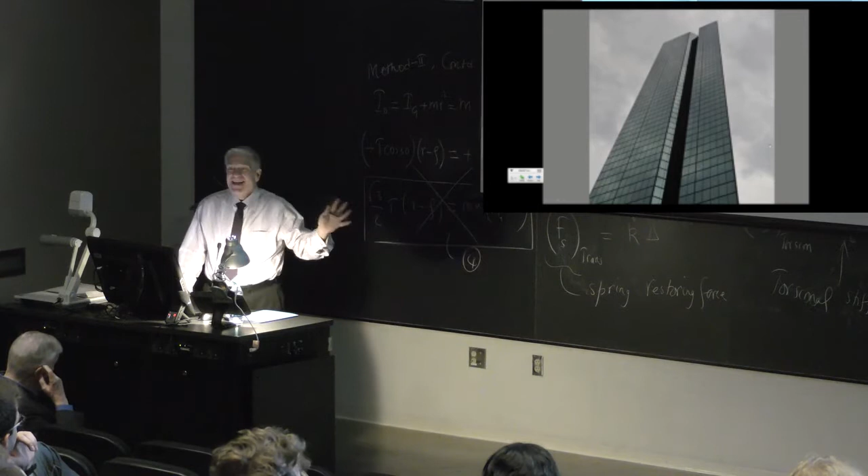Now, there are dozens and dozens of cases like this, and I'm not going to show them all to you, but my favorite one of all, this is the effect of dynamic symmetry that I think you'll see. And so it's these two together. This is the most spectacular case of all of that double symmetry.

These are the Center for Government and International Studies at Harvard, and you'll notice that it's the twins rotated opposite from each other, and Cambridge Street goes right down the middle of it. Now, it's pretty weird from here, but when you're walking down that street, this is exactly what you see.

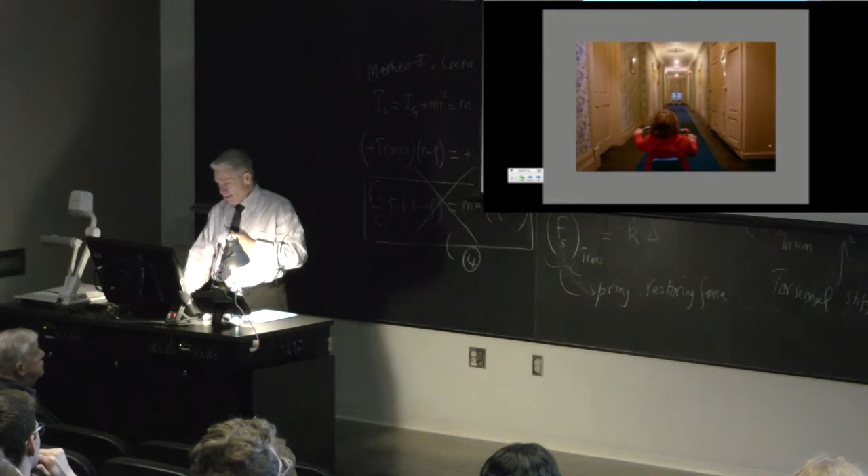As you look on the left and you think, wow, that's a nice kind of weird building, and I get the geometry, it's very simple. Then you look on the right and you go, whoa, wait a minute, what's that? Then I thought about this a lot.

In his lecture, he starts talking about the Carpenter Center. I thought, wait a minute, this is nothing but the Carpenter Center reinstalled back at Harvard, because as he discusses the Carpenter Center, he's lamenting for Corb, because Corb, instead of getting to be built on the quadrangle, he got ostracized to the outskirts of Harvard.

And so the entire analysis of the road through the two lobes was a lament by Corb and a kind of aggressive act of brilliance, what he calls a nuclear work of architecture. And I realized Harry has just been thrown off of the Harvard campus. He doesn't have another building on the Harvard campus, and so he's feeling a kind of sympathy with Corb, and maybe kind of a nightmarish sympathy with Corb, and coming from the world in which Drew Faust runs.

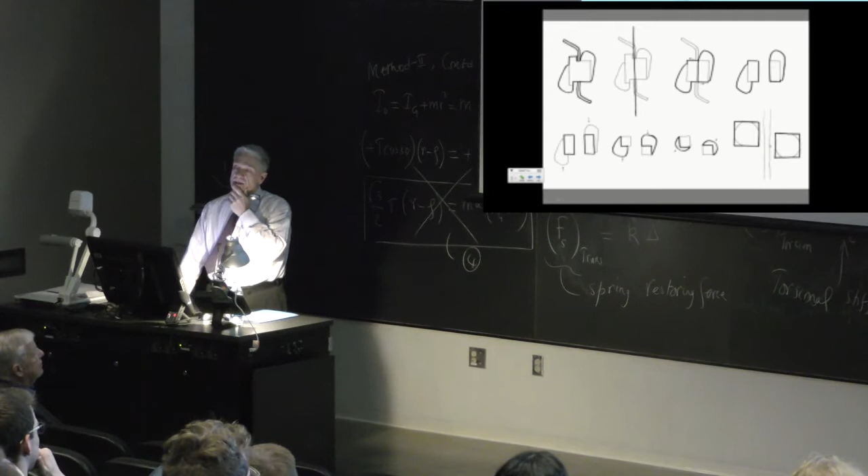Alex Mann and I tried to work out the transformational drawings. You can kind of see how it happens. And as I was doing this, I thought, there's something really weird about this, because if you do exactly the same geometrical transformation that changes the lobe into the teardrop, you can see it, if you did that to B, it would change it to R, and it would change Cobb to Corb. It's a very interesting thing we started to think about.

And so anyway, I don't want you to think this is the only horrific side of Harry, so I'm going to show you one little thing. He's also done recently an installation at SciArc. Okay, Dustin, there you go. And this is just a little film of the installation.

And where he decided to build a hypostyle hall, and the idea was he was going to take 3x8 doors that he bought at Lowe's or something like that. 3x8 because they're the most humane proportions of a door. And then he was going to build a hypostyle inside this gallery, and this is how you can see it working. These are people walking around through it. And those are the hypostyles, and then those are the doors, and it's quite a brilliant piece of architecture.

But as you look at it and as you study it, you realize there's something very weird about it. Like, this is it in perspective. What's weird about it is it's really a scary place. You can hide in it. In fact, it's so scary, it becomes the very apotheosis of what you don't do in a city.

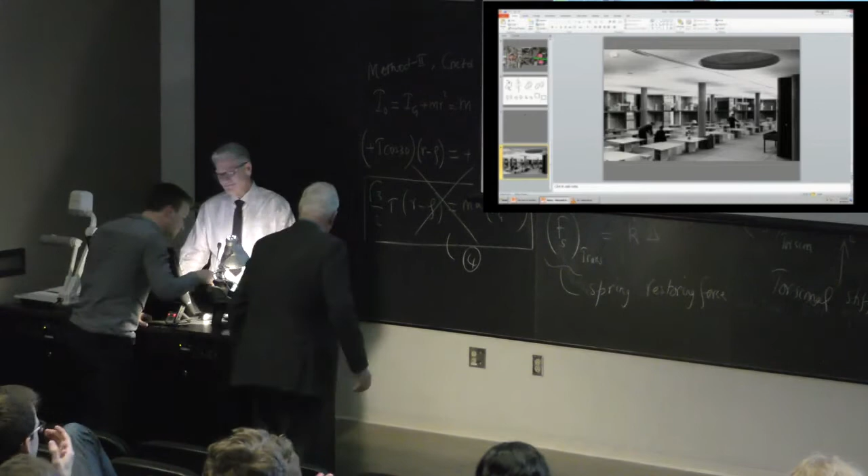Okay, let me get it for you. Let me start it, okay? That's it, perfect, thank you. I'm going to take this and put it up there.

Well, Jeff, that was wonderful, thank you. I certainly have no intention of making any claim on an analogy between COBB and CORB, but I really appreciate your analogies, and I'm delighted to be here with you and with Wes Jones for these seminars and for this lecture.

Now, as a prologue to my talk this evening... something's not working. Try now. Okay, thank you.

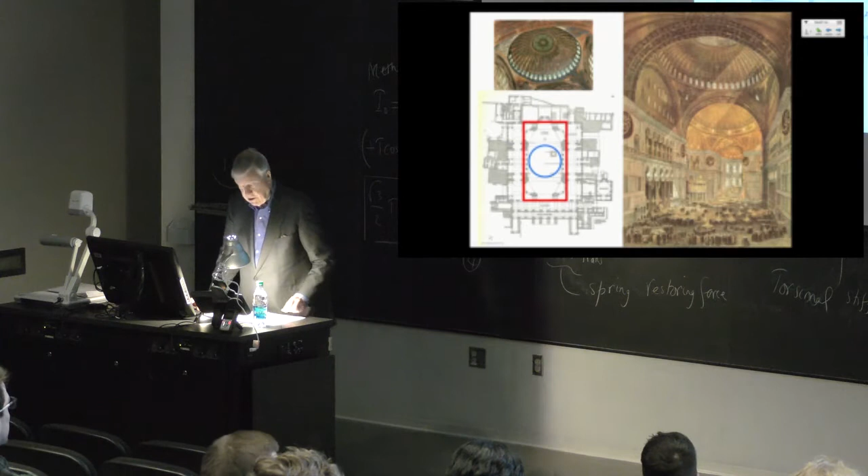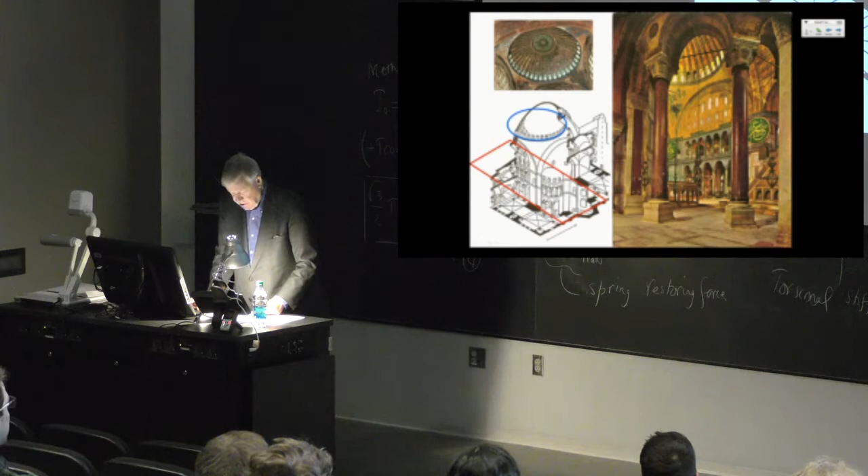Structurally, Hagia Sophia is a brilliant tour de force, but this accolade does not begin to explain the emotive intensity of its interior. What stirs us in this extraordinary polyphonic composition is the bringing together of two powerful but opposite intentions: stability, absolutism, wholeness, symmetry, juxtaposed with asymmetry, incompleteness, anxiety, and aspiration. Each of these two opposing value systems is rendered eloquent by the presence of the other, and they are synthesized in a way that greatly intensifies the dialogue between them.

Here, architecture has given voice to St. Augustine's conception of love as a dynamic, energizing force, a forward movement of the mind. And yet, here we also see this characteristic Christian impulse, this anxiety of spirit, brilliantly joined with its opposite, a reassertion of absolutism and immutability in the temporal affairs of mankind.

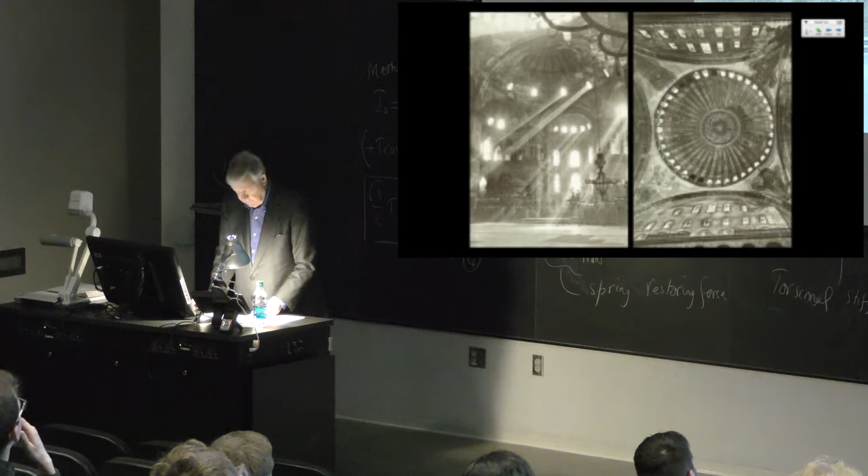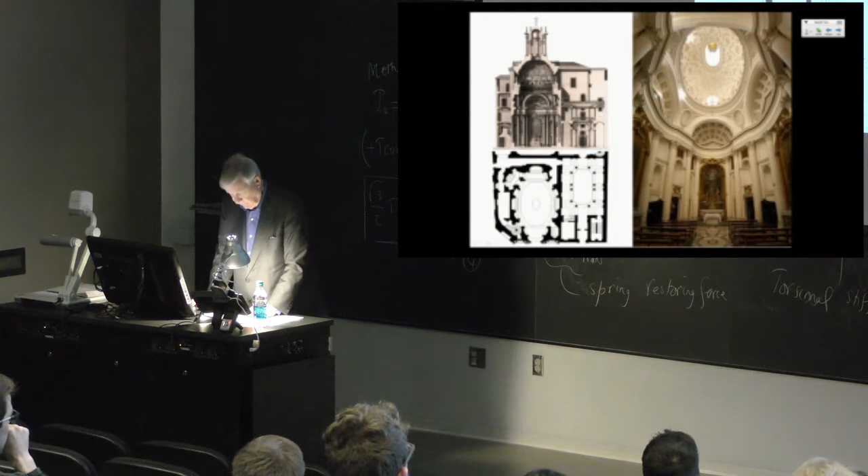In the 17th century church of San Carlo alle Quattro Fontane in Rome, Francesco Borromini gave entirely new meaning to the discourse between dome and basilica first evidenced in Hagia Sophia. Here we see both forms have been radically reshaped so as to produce a dynamic and highly integrated spatial construct wherein the aspirational and the immutable are joined to form a geometrically complex and infinitely suggestive whole.

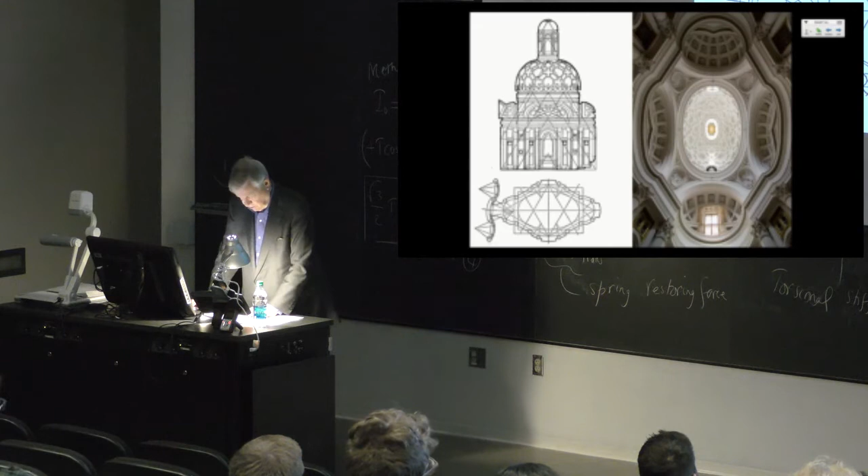The indispensable operative element in this great work is the undulating entablature that distorts the array of columns below while forming a base for pendentives that then make the transition to the oval dome above. The discourse thus engendered redefines the nature of the struggle between aspiration and absolutism. What in Hagia Sophia is presented as an unresolved conflict between church and state is here declared to be an unresolved conflict within the church itself, a conflict brought vividly to life by the genius of the architect.

The stated purpose to be served by the building was the integration of the visual arts, both their appreciation and their practice, into the everyday life of the college. But instead of being granted a suitably prominent place in the Harvard Yard with its spacious quadrangles crisscrossed by diagonal paths, the Carpenter Center was relegated to a cramped and altogether marginal site hemmed in by pre-existing buildings.

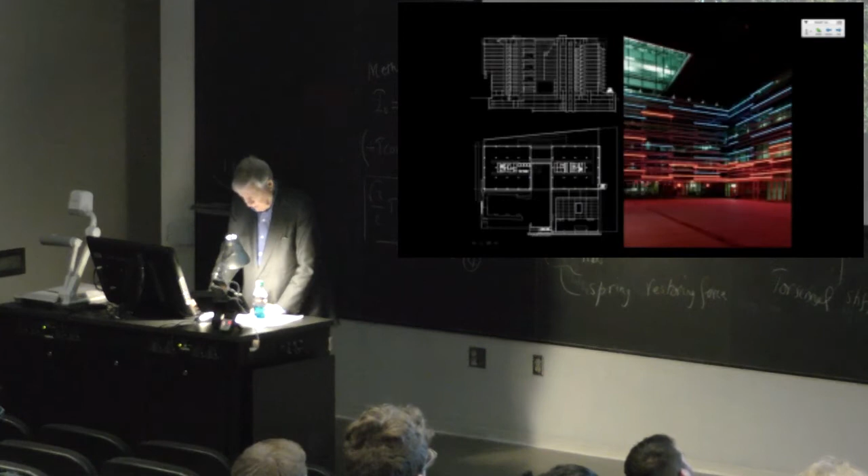The Caltrans District 7 headquarters in downtown Los Angeles, completed in 2004, is one of Thom Mayne's most provocative built works, inviting a question similar to that raised by Palazzo Chiericati. Is the enormous void in this building's otherwise impenetrable volume to be understood as a gathering place for its employee occupants, or as an extension of the city's public realm? And as with Palladio's great work, the answer is yes to both readings.

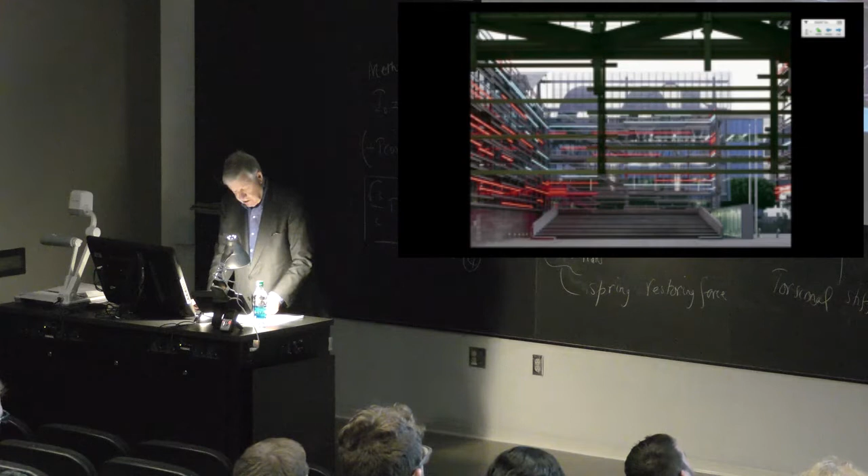But whereas in Vicenza this double reading is accomplished through the subtle articulation of a colonnaded porch, in Los Angeles it is the product of a boldly forceful voiding of the building volume and a complementary extension of a secondary volume so as to frame a civic space that oscillates marvelously between conditions of interiority and exteriority. This altogether thrilling space, further dramatized by Keith Sonnier's light installation, resolves without suppressing the paradoxical predicament of a public service bureaucracy grown so large that only a perfect act of architecture, as performed here, can make its presence not only tolerable but intensely meaningful to the public it serves.

Diverse as they are in size, character, and purpose, all five of the buildings we've just seen, each a masterwork that could well be the subject of its own lecture, all vividly exemplify the remarkable capacity of architecture to illuminate ambiguity, paradox, and contrariety as they occur in the programs and purposes that buildings are asked to serve. In the course of my own by now quite long professional life, I've faced a number of challenges that invited, indeed compelled me to call on that same capacity, and I want to touch briefly on a few of these.

But since I'm a stranger to most of you in this room, I should first inform you that my entire life as a practicing architect has been enabled and sustained by the firm of which I was one of 3 founders in 1955, and am today one of 8 partners among about 100 colleagues. Hence, while you will hear me speaking here often in the first person singular, please bear in mind that the built works to which I will refer are actually the products of extensive and close collaboration with close colleagues whose contributions have often been so much more than merely instrumental.

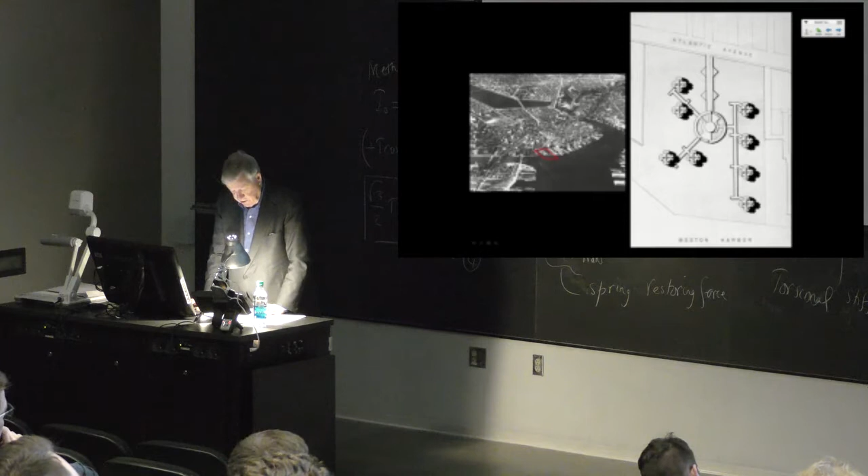My own Harvard thesis project, while more modest in scale, displayed an equal contempt for the historic fabric of Boston. Rather than work within that fabric, I chose to cast my proposal for urban housing as an aloof and emphatically autonomous cluster of towers rising out of the water, adjacent to but disengaged from the city itself.

By the time I submitted this project in March of 1949, just over 66 years ago, I had already convinced myself that Boston was hopelessly moribund—socially, economically, culturally, politically—and that nothing of interest to me was likely to happen there in my lifetime.

So I abandoned my hometown and hurried off to New York to join I.M. Pei in his then fledgling practice under the auspices of the legendary developer William Zeckendorf Sr.

Ironically, the reward for my early infidelity was a series of challenges that have obliged me to think deeply about Boston throughout most of the ensuing half-century. But I'm getting ahead of myself.

The first decade of my work with Pei took me much further afield in the service of Zeckendorf's insatiable appetite for large undertakings. Most notable among them, Place Ville-Marie, a 4 million square foot center city development in Montreal that would become his largest, and remains my largest, built work.

When completed in 1962, the Royal Bank of Canada Tower was the tallest such building in Canada.

Aside from noting its clearly derivative and oddly hybrid character—a body by Le Corbusier decked out in Miesian drag—two remarks may be made about this early work. First, that it adheres strictly to the modernist conception of the tall building as a resolutely autonomous, self-referential organism, shaped entirely by its own internal needs and systems.

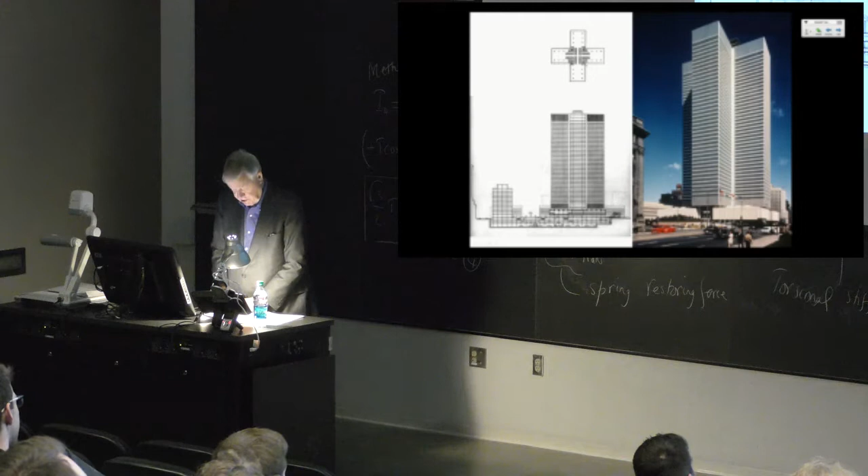Second, that this huge urban development project, embracing more than 7 acres of land above Montreal's Central Railway Station, was very much the kind of opportunity I had left Boston in search of—that is, a building project of a scale that invited radical reordering of the spatial, volumetric, and circulatory systems of the city.

It was, of course, gratifying to the ego of a young architect to have his very first building appear on a postage stamp, together with the Cathedral of Montreal.

But in truth, the only aspect of this tower that I still consider worthy of note is not the way it meets the sky, but the way it meets the ground—a levitational inversion of solid and void that prefigures my lifelong preoccupation with the question of how towers can be made to shape, rather than merely preempt, the space of the city.

Even before the Montreal Tower was completed, I was called back to Boston in the winter of 1961 for the first of our many assignments there, the planning of Government Center.

Although we designed none of its buildings, we were responsible for the urban design framework within which the various building projects were sited. We were thus responsible for reducing the number of streets within the 50-acre urban renewal area from 22 to 6, and also for the size and shape, though not the detailed design, of the public plaza at its heart.

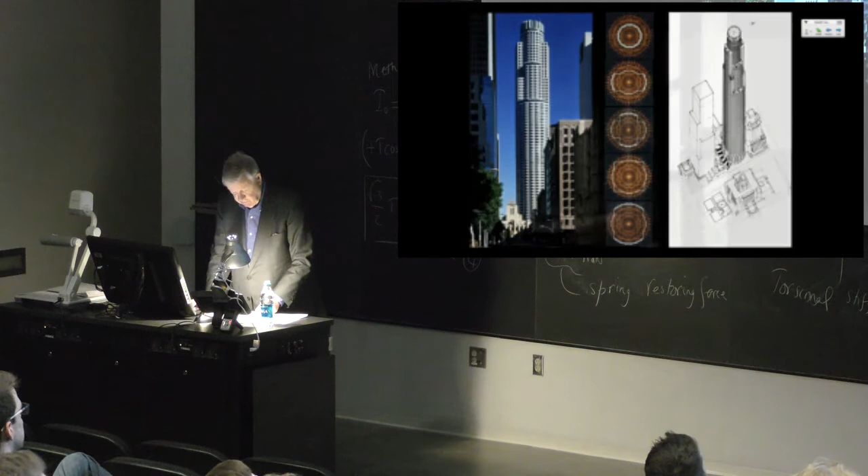The stepped form of this skyscraper is governed by a concentric geometry of twelve whirling squares that is variously but rigorously manifested as the building rises from street-level lobby to its crown.

I suppose this iconic form is what has made Library Tower so attractive to the makers of disaster films, whether as the first building to be vaporized in Independence Day,

Hasn't quite finished? Oh, okay. Ran out, sorry. Not quite, we'll run that through again.

Or as the irresistible wraparound opportunity in Dragon Wars, one of the trashiest films ever made. I'm not sure what to make of all this—is it kit bashing, or could this monster be the avenging angel of Triple O?

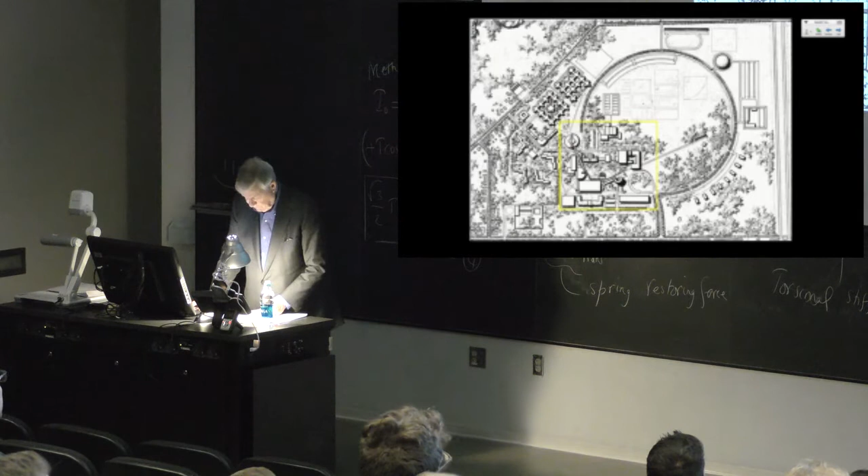We conceived of this spine not as a separate, isolated structure, but as a continuously modulated element, half building and half landscape, integrating and energizing—in a formal as much as a circulatory sense—the programmatically discrete components of the campus center. The design of each of these components is intimately affected by its interaction with the spine.

In other words, each bears a contingent relationship to the spine, while the spine itself, however modified by its conjunction with those components, remains by and large the autonomous directive element of the scheme.

The administration building, for example, though its height gives it prominence in announcing the point of entry to the campus, is positioned and shaped in such a way that it cannot possibly be read as the center of college life, nor as its most significant entity.

The library, on the other hand, appears by virtue of its central position and undisturbed rectangular roof form to be autonomous and almost independent of the spine. Yet when we look beneath the roof, we find that the convergence of the two arms of the spine within the library constitutes a major intervention shaping the space of the reading room below.

In addition to its exploration of contingency and part-to-whole relationships, the academic center at Fredonia bears witness to my enthusiasm in early mid-career for a monolithic architecture of cast-in-place reinforced concrete, with its corollary celebration of spent light—that is, the role of daylight in shaping the perception of volume and space, a task that light performs most effectively by spending itself in its encounter with monochrome surfaces.

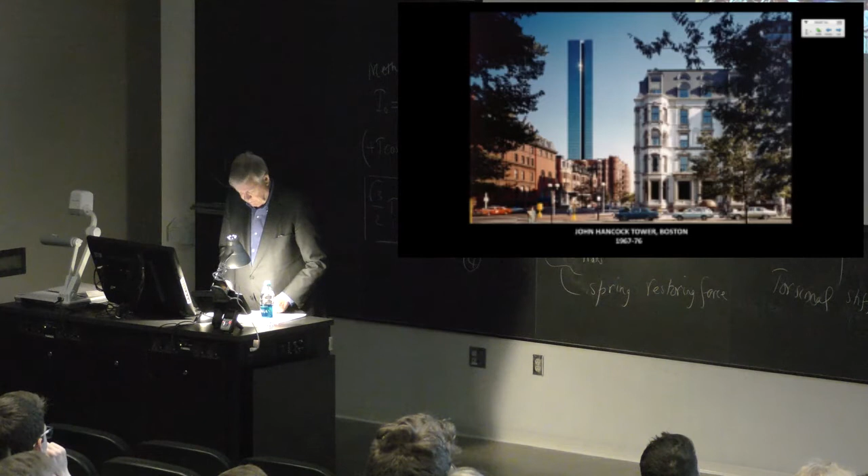We come now to the skyscraper that most vividly exemplifies the shift in my sensibility and aspirations first evidenced in Fredonia.

The floor plan of the John Hancock Tower exhibits, for the most part, a rigorous adherence to the discipline imposed by those characteristic internal systems—structural, mechanical, circulatory, operational—that largely determine the design of every tall office building.

But we may observe the presence of one feature that seems to challenge the hegemony of internal systems, namely the skewing of end walls so as to produce a notched rhomboid rather than a rectangular plan form. While this deviation has been accomplished in a way that is coherent with systemic elements of the plan, it nonetheless cannot be explained by reference to any identifiable internal need.

I pause here—I don't think I can... does this show up on the screen? Yes, it does.

Here, where my arrow is pointing, that's the solid black wall at each end that Jeff was referring to and misinterpreting.

But what you can see very clearly here is the reason that wall is solid—he's provoking me to extend my lecture to say this. The reason this wall is solid, whereas all the rest of the building envelope is glass, is that this wall is the extension of the outside wall of the core, and that wall is the extension of the other outside wall of the core. Quite aside from that, had both of these surfaces been glass, it would have been a much less interesting building, visually.

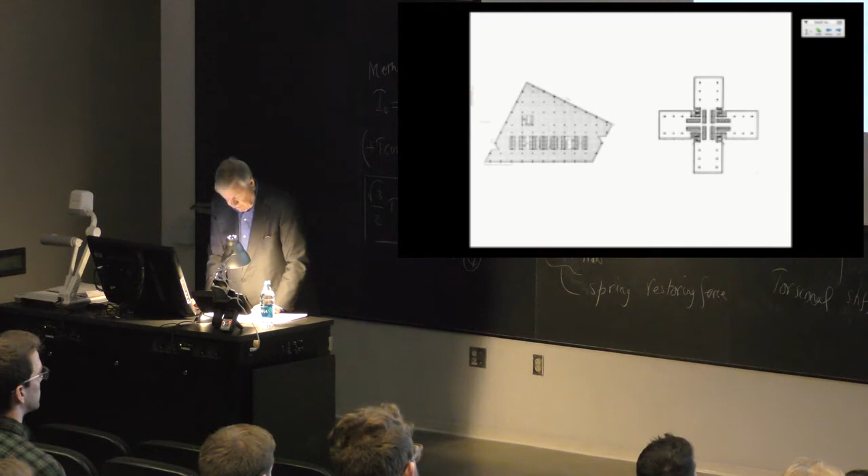The rhomboid tower rising from its trapezoidal base is then immediately perceived as a response to the particular external situation of the building, most notably its adjacency to Copley Square and H.H. Richardson's Trinity Church.

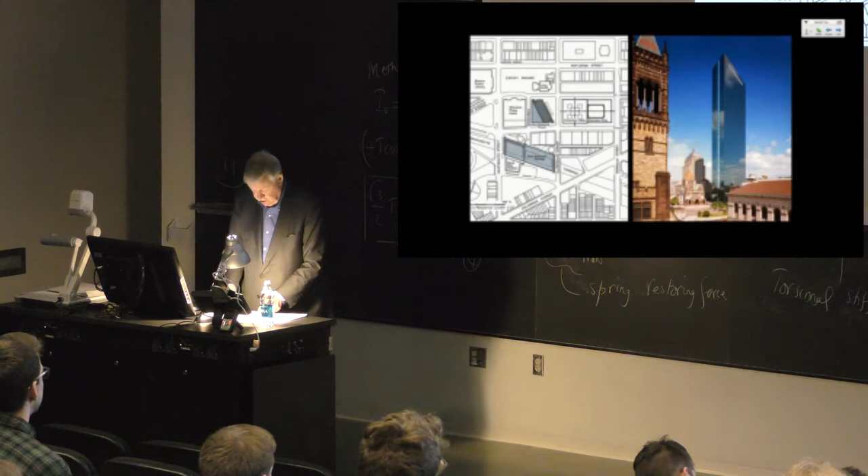But just what was that situation? It was our answer to this question that caused so much fear and loathing in the city of my birth. I argued that in order to understand what should be done now to revalidate this civic space, engulfed as it had been in an explosion of commerce that seemed to render it meaningless and irrelevant, we needed first to understand how it had reached this impasse—to place it, so to speak, in the stream of history.

The resulting study—I don't have time to show it here—an act of radical anamnesis retracing the century-long evolution of Copley Square, led us to propose that in order to recover its vitality and draw strength from the new scale that had engulfed it, Copley Square should have its own tower.

Thus was born the concept of a contingent skyscraper—that is to say, a work of architecture specifically responsive in form, material, and detail to its urban setting, in this case the church and the public open space that are its neighbors.

The storm of protest that greeted our proposal was the beginning, but unfortunately not the end, of our troubles over the ensuing 8 years of construction, during which the Hancock Tower suffered several widely publicized building failures.

This all occurred before any of you were born, but you may have heard of it. Among other corrective measures, all 10,344 panels of glass in the curtain wall had to be removed and replaced.

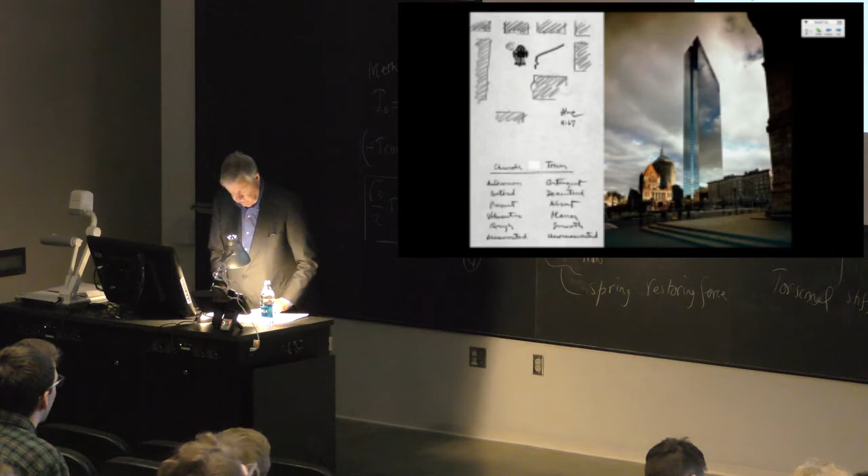The extreme disparity in size between the tower and the church was the central predicament we faced. We chose to deal with it not by creating a gratuitous distance between the two, which would only have exacerbated the problem, but by bringing them into close proximity while positioning and shaping the tower so that it becomes the contingent satellite in a composition of which the church is unequivocally reaffirmed as the autonomous center.

Thus, as a work of architecture, the Hancock Tower is defined entirely by its preoccupation with the task of reconciling, without suppressing, two entirely opposite and seemingly irreconcilable intentions: on the one hand, the assertion of commercial power, and on the other hand, the primacy of public buildings and civic space. To accomplish this, several aspects of the tower's design may be cited as essential.

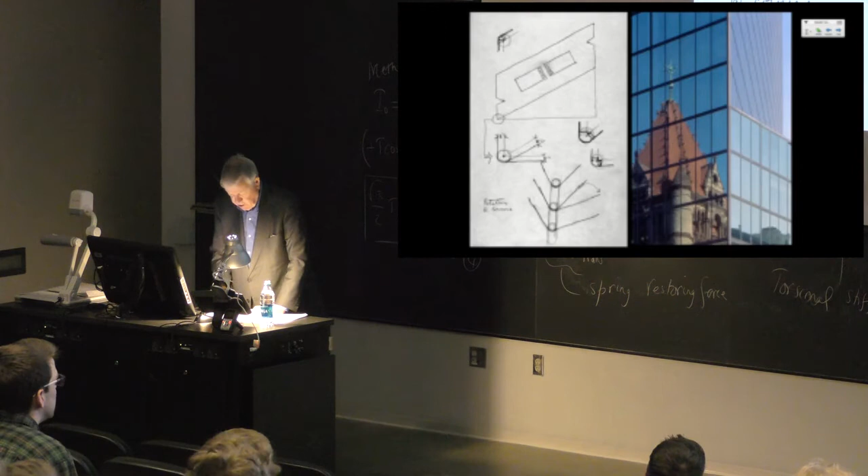First, the attenuated rhomboid plan form, placed diagonally on its site, emphasizes the planar while minimizing the volumetric presence of the building, so as to effectively disembody the tower as seen from the square. Second, a bullnose corner detail facilitates the crucially important transition from trapezoidal base to rhomboid tower. Third, notches bisecting the end walls accentuate the weightless verticality of these planes and make legible the tower's non-rectangular geometry.

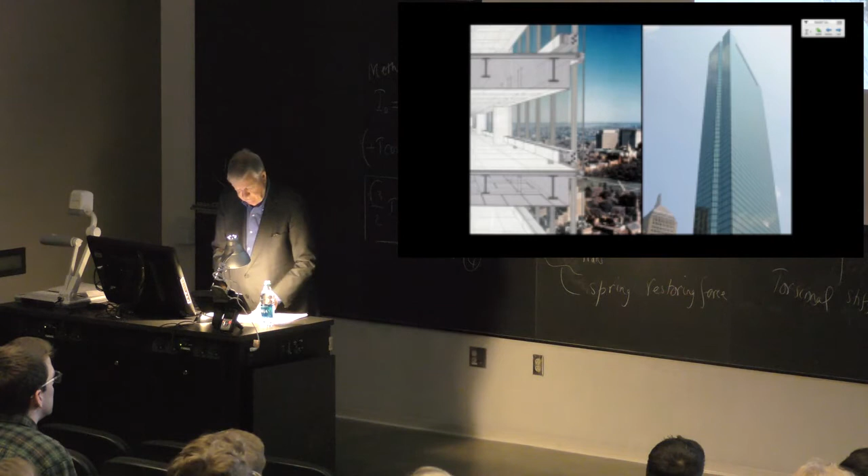Fourth, the tower's uniformly gridded and reflective surface, stripped of all elements that could suggest a third dimension, mutes the obtrusiveness of its enormous bulk and defers in all respects to the rich sculptural qualities of its much smaller neighbor. Finally, the triangular space between the church and the broad face of the tower pays homage to the apsidal view of Richardson's building, reinforcing its intended role as the architectural cynosure of Copley Square.

With regard to this latter aspect, it should be noted that the three-story lobby at the base of the tower is sheathed in precisely the same manner as all other floors. Because had the monumental scale of this space been directly exposed to view, it would surely have destroyed the delicate balance in the dialogue between church and tower.

In October 1980, four years after the tower's completion, in my inaugural lecture as architecture chair at Harvard, I summed up my view of the matter as follows: We adopted a strategy of minimalism in the design of the Hancock Tower, not for ideological reasons, but because the situation of the building demanded it.

In the determined pursuit of our goal, to achieve a symbiosis between the church, the tower, and the square, we excluded everything that did not contribute directly to this end. For we believed that only thus could we temper the inherent arrogance of so large a building and endow it with a presence that might animate rather than oppress the urban scene.

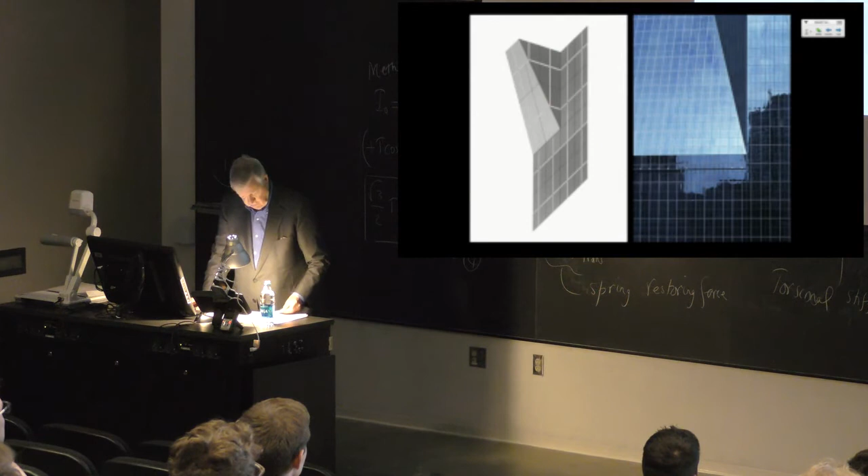As these images show, an architecture of folding requires that the curtain wall be detailed in such a way as to confine all its visible elements to a surface of zero thickness.

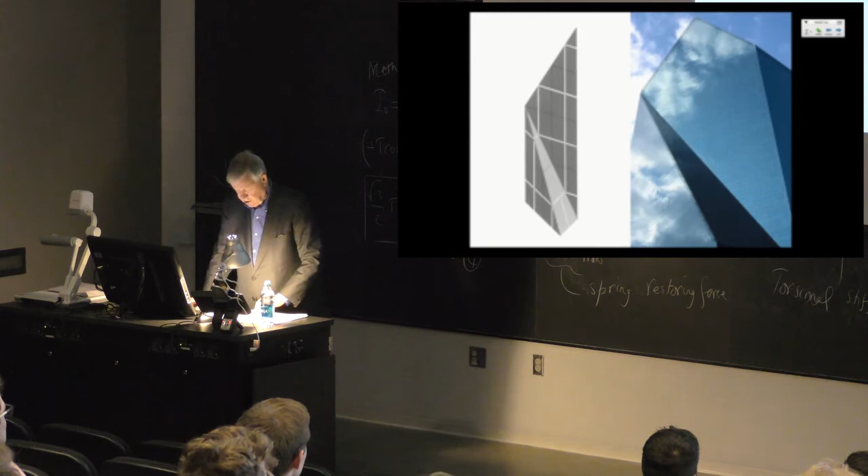In this instance, the form thus produced presents dramatically varied profiles when seen from different points of view, creating the illusion as one moves around it that this huge monolith 60 stories high is itself in motion, as if performing a dance. The diagram on the left shows how the tower's structural skeleton allows one half of its floor area

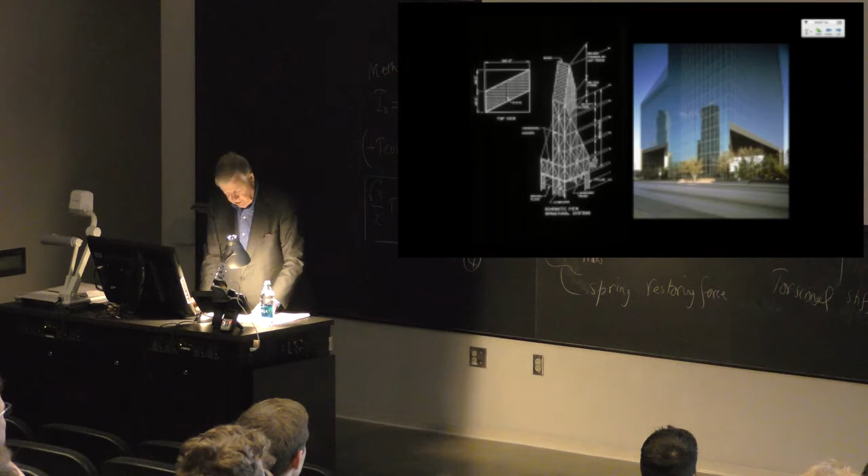to be cut away for a distance of 60 feet above the ground, so that Dan Kiley's densely forested water garden at its base can flow right through beneath it. An act of citizenship that animates the space of the city at street level, just as the tower's profile animates its skyline.

The need for ever larger buildings led to an inversion of the relationship between solid and void. Whereas earlier campus buildings had helped to shape figural space, newer buildings often simply preempted space, and by their immense size and overbearing character, tended to render the spaces between them residual and meaningless.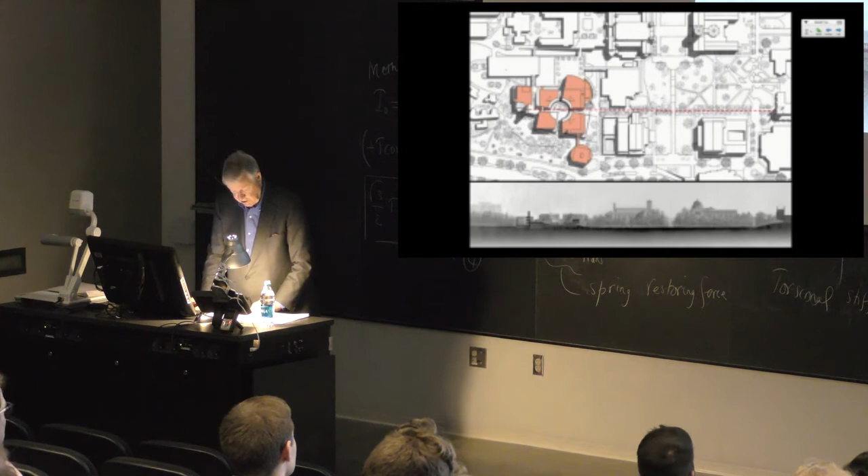Our aim in the Anderson School was explicitly to reverse this trend. We wanted to show that even a very large building, and this was to be the second largest at UCLA, could be so configured as to restore the primacy of space over object and thus enrich rather than further impoverish the spatial fabric of the campus.

To accomplish this, the building was conceived as a set of 6 separate but interconnected fragments that together shape pathways and gathering places, inviting passage from the lower to an upper campus level separated by a vertical distance of 60 feet. Thus, the most important characteristics of the Anderson School, intimacy and permeability, are placed in the service not just of its own constituency, but of the entire university community.

Because this building is a close neighbor to Royce Hall, which together with Powell Library defines the emblematic heart of the UCLA campus, we thought it appropriate to employ the same Norman brick with precast concrete trim matching the limestone of those earlier buildings. But respect for precedent need not preclude formal invention, as shown here by an incision that brings the sky down into the body of the Anderson School, celebrating its axial relationship with the tower of a student union at the opposite end of the campus pathway.

Now back once again to Boston, where on a spectacular waterfront site overlooking a city now so altered as to be scarcely recognizable as the city of my birth, I was at last asked to design a truly public building, a building destined to be experienced not just externally as object, but internally as space. And by its nature, inviting an architecture that, unlike the Hancock Tower, not only need not, but clearly must not remain speechless.

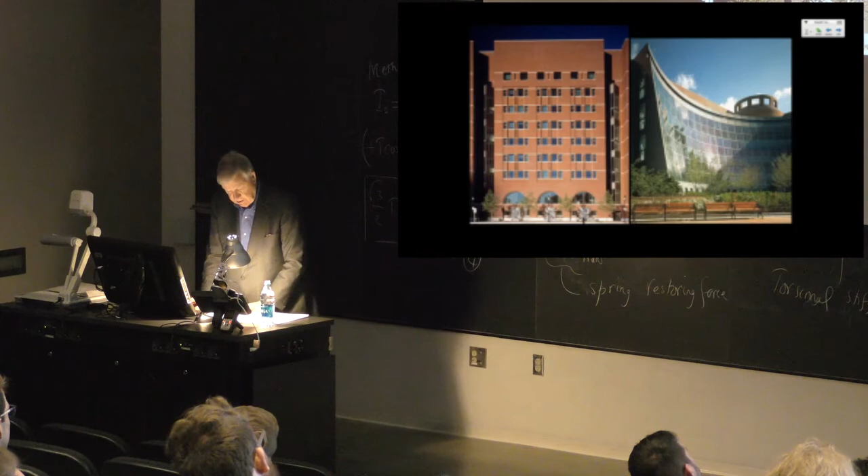The Boston Courthouse embodies our shared intention to acknowledge and indeed to celebrate in architecture the opposing terms of these 2 paradoxes. While this intention is clearly evident in the building's exterior with its reference to the traditions of its place on the one hand and its emblematic departure from them on the other, it is in the experience of its interior spaces that our preoccupation with these dualities is most explicitly revealed.

Having passed through a monumental entry arch, one proceeds through a skylit reception hall to a central rotunda that seems to affirm unequivocally the separateness of the judicial process from the everyday life of the street, a separateness embodied both in the serene autonomy of its cylindrical form and in the equally serene abstraction of Ellsworth Kelly's paintings on its walls.

But when, upon arriving at one of the upper floors, one emerges into the gallery that gives access to the courtrooms, a panoramic view of the city and its harbor offers a vivid reminder that the courts are not so separate after all, that indeed they exist to serve the contemporary needs of the ever-changing world beyond their walls.

Then, turning toward the courtroom, separateness and respect for precedent are again suggested by the half-dome entrance, and further reaffirmed within the room itself, where large arches dignify equally all participants in the judicial process: judge, jury, witnesses, and the interested public, while the domed ceiling declares the centrality of the litigants to the proceedings taking place therein.

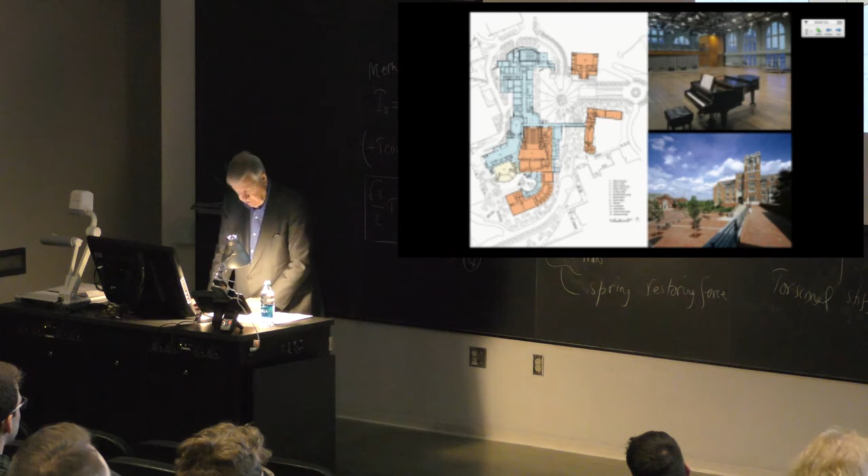Fundamental to the transformation it wrought were 2 governing ideas. First, that the environmental quality of a campus, indeed of any community, can be significantly enhanced by the conservation and imaginative reuse of existing buildings in conjunction with new construction.

And second, that a key goal of any campus building project, beyond providing needed facilities, must be to shape attractive and accessible gathering places, both interior and exterior, so as to engender a strong sense of shared values and shared purpose in the community they serve.

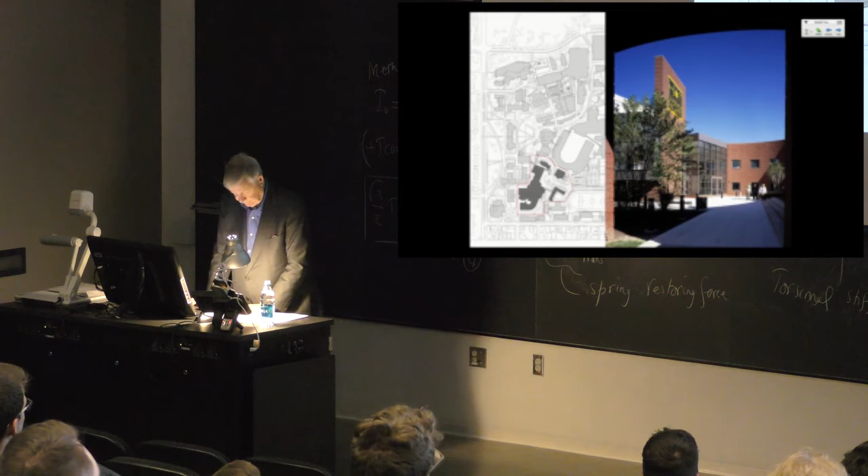Tour EDF at La Défense on the outskirts of Paris exemplifies my ongoing effort, begun with Hancock, to transmute the office tower from an autonomous into a contingent presence, to give it, so to speak, the demeanor of a good citizen, by deforming it in response to the specific circumstances of its urban context.

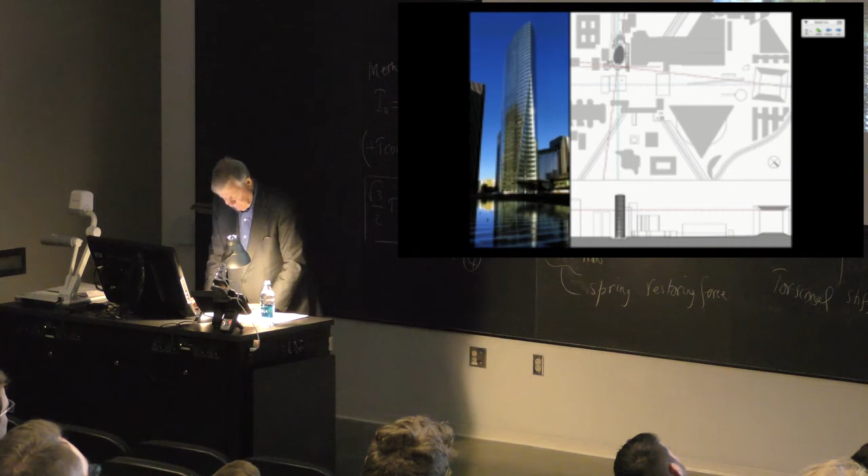In this case, the building's prow, located precisely on the skewed centerline of the Grande Arche, is cut away by means of a conical incision, so that the tower makes a gesture towards the historic monument in front of which it stands. At the base of this incision, a circular marquise, 20 meters in diameter, creates a gathering place where passers-by are invited to pause and enjoy the axial view of the Grande Arche from a sheltered vantage point beneath the generous canopy of stainless steel and glass.

Thus does this entirely private building, it serves as the headquarters for Électricité de France, become the occasion for shaping a memorable public space.

Palazzo Lombardia in Milan, the new seat of government for the Lombardy region, is located not far from that city's most famous skyscraper, Gio Ponti's Pirelli Tower.

In our project, a slender bifurcated tower emerges as the fragmentary vertical extension of sinuous intersecting strands of linear office space, themselves fragments of 11 identical circular rings that comprise the main body of this very large public building.

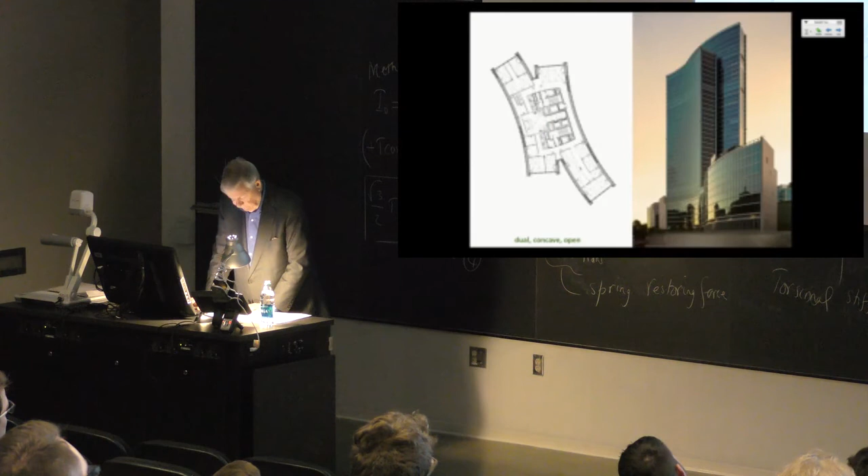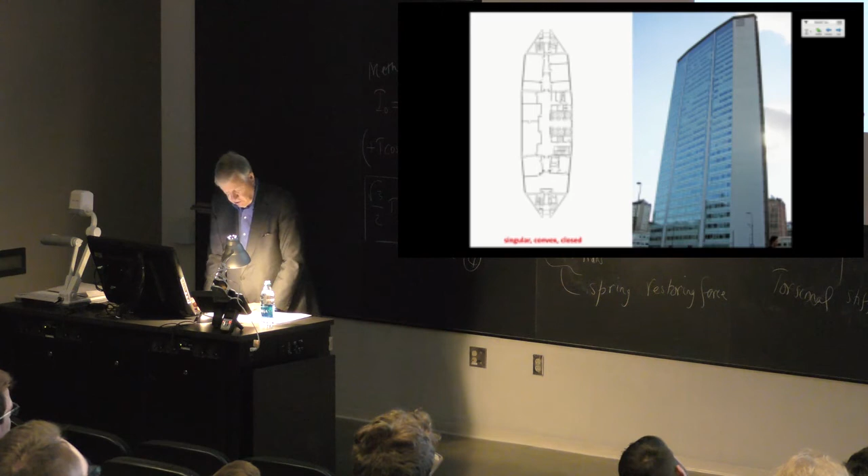Our tower thus assumes a form that is dual, concave, and casually composed, contrasting with and deferring to the singular convex, resolutely autonomous volume of its distinguished neighbor.

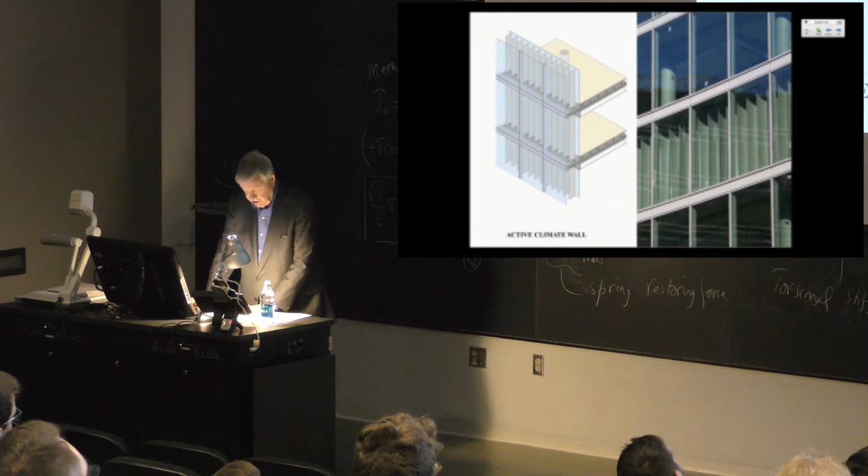The complementary and contingent status of our tower is further enhanced by the character of its enclosure, an active climate wall composed of 2 layers of glass separated by a 1 meter wide space within which vertical louvers provide efficient sun shading while allowing maximum transparency of the building envelope.

Important, I believed, in a bureaucratic building full of public servants whose activities should be made visible to the people they serve.

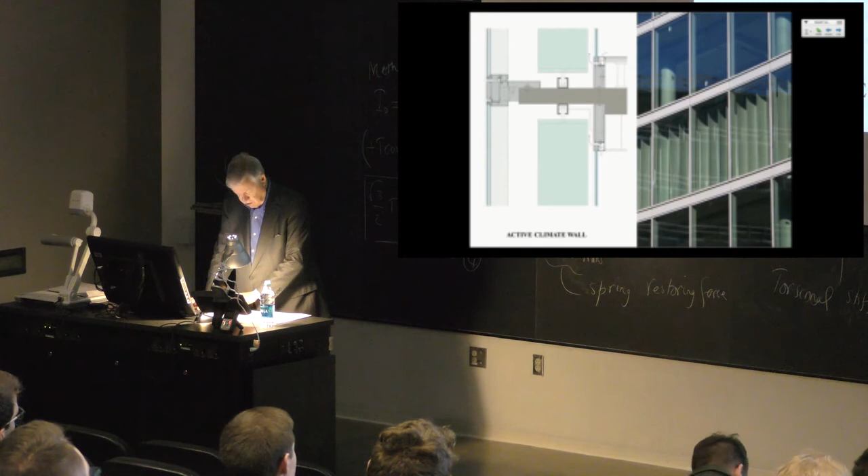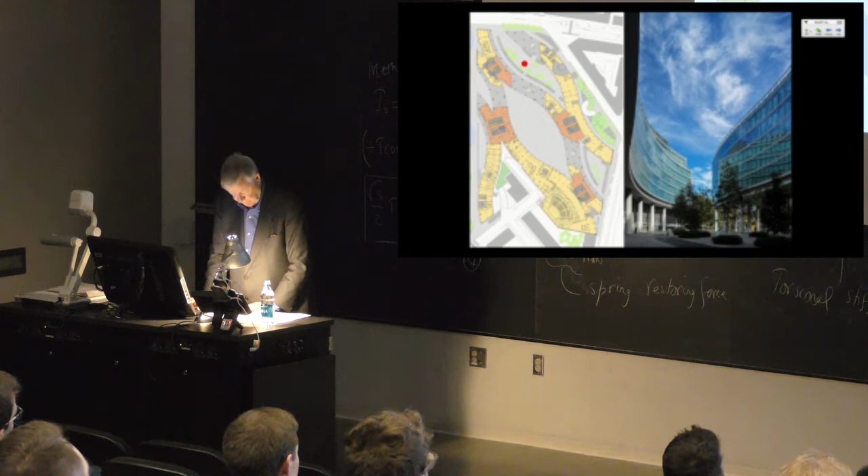Like the tower's form, this double wall is an extension of surfaces below that enclose the low-rise office floors and shape the central piazza, together with ancillary public spaces inviting access from the surrounding city at street level.

Placing now the ground floor plan of Palazzo Lombardia into its larger urban context, we can see how the concept of interweaving strands has sponsored a formally coherent transition from tower above to podium below, and thence to the sequence of street-level open spaces that join the central piazza seamlessly to the city around it.

A transfiguration is thus accomplished from emblematic object on the skyline to emblematic space at street level.

In discussing a few of my built works across 65 years of practice, my purpose has been at least as much to illuminate the questions asked and the problems encountered as to present the answers given and solutions devised.

Addressing those of you here who now stand on the threshold of practice, I hope this exercise in selective recall, with its reference to events in my life that you must see as belonging to ancient history, may yet be in some way useful to you as you embark on your own lives in architecture.